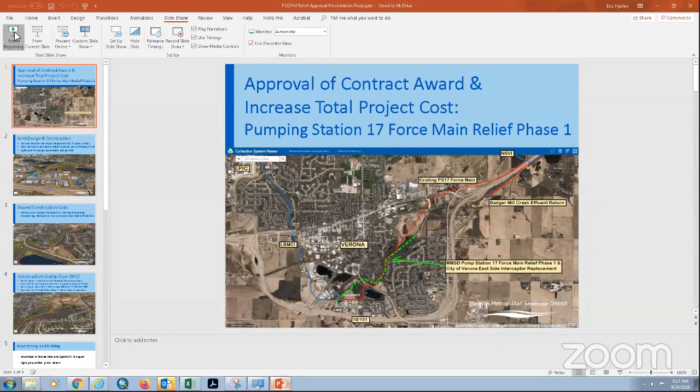I'm presenting on approval of the contract award and increase in total project cost for the Pumping Station 17 force main relief. What you're seeing on the screen in green, the green dashed line, is the Pump Station 17 force main relief project, phase one.

The need for this project is additional capacity needed approximately 2025 due to growth in the City of Verona and in the lower Badger Mill Creek basin on the west side of Madison.

In approximately 2025, we will complete the lower Badger Mill Creek interceptor, phase 5 of that. That's on the left side of the screen. I'm pointing to it with my cursor right now.

There's a City of Madison lift station at Midtown Road. At that time, that lift station will be relieved by the lower Badger Mill Creek interceptor, and all that flow is going to go to Pump Station 17 in Verona.

This is phase one. The schedule is being driven by the City of Verona. I'll discuss their portion of the project on the next slide. For phase two, we will need to connect from the end of this green line, the end of this project, to our existing interceptor system.

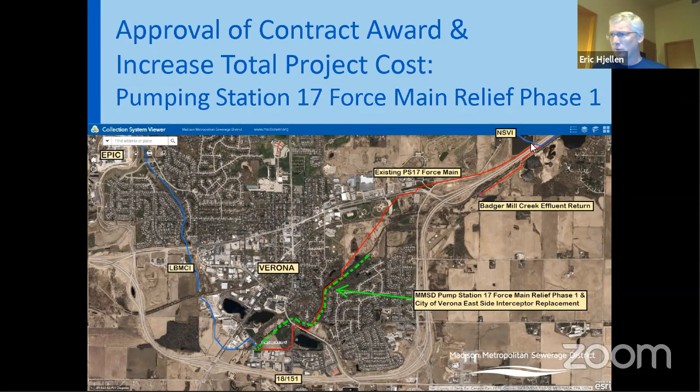The red line is our existing Pump Station 17 force main. We're going to need additional capacity in that system, so our project is going to build a new relief force main. We're going to keep the existing force main and have a second additional force main.

We've been working with Theron Jacobson, the Verona Public Works Director, and his staff. They've taken the lead on negotiating easements and permits. We've been involved too. It's been great working with them, professional staff. Really appreciate the work that they've done and the professionalism in working with them.

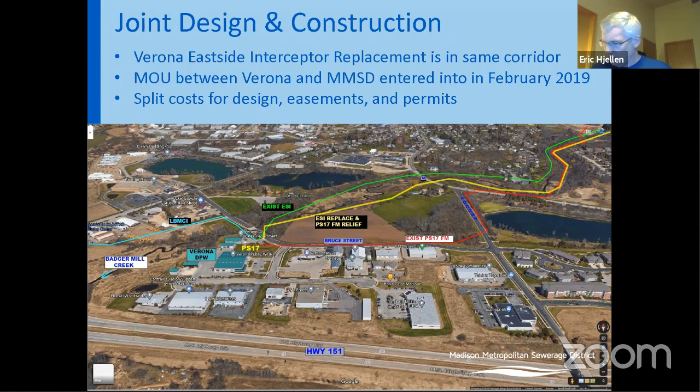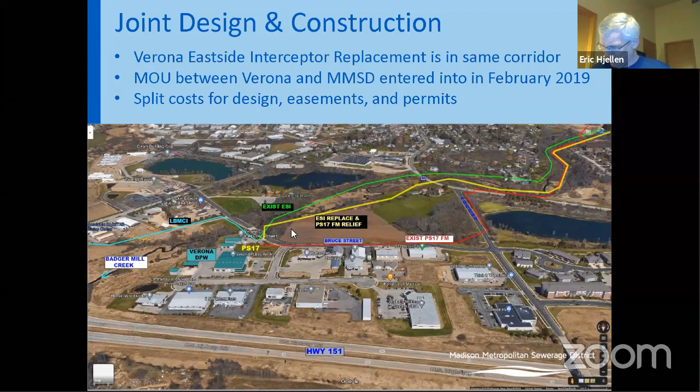As I said, the phase 1 portion is being driven by the city's schedule. They need to replace the existing east side interceptor now. I'm going to move on to the next slide.

This is just moving up the corridor to the north a little bit. Yellow is still our project. The green line is the existing east side interceptor. The red line is the existing MMSD Pump Station 17 force main.

There will be shared construction costs on this. So in addition to the savings on easements and permits, and a little bit on design, we'll save on construction as well. For instance, in this photograph, you can see we're crossing the stream a couple times there, so all the clearing and grubbing, we'll share those costs, mobilization, dewatering.

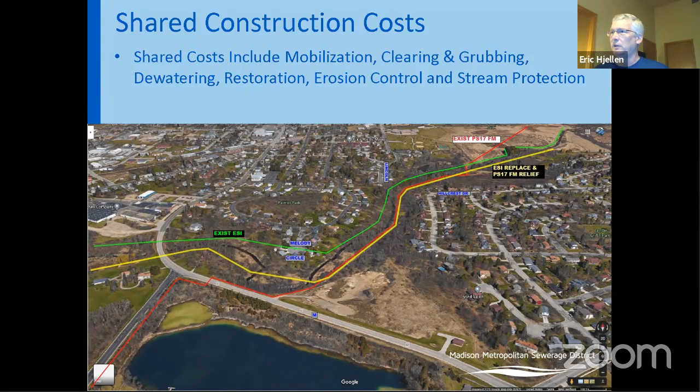Dewatering is going to be a large portion of the costs on this project. Erosion controls, stream bank protection. I'm going to get into a little bit on the cost split now.

Again, we've just moved up a little bit to the north here. The yellow line is the project I'm speaking of, phase 1. On the opinion of probable construction costs, the OPC, there were 96 bid items, and the cost split for construction is based on a review of the opinion of probable construction costs.

I'm going to back up a little bit and describe how we have done projects in the past. I'm going to use this one as an example. There's our project and then Verona's project. I'll call ours project A and Verona project B.

So we would take our project A and figure out all the bid items associated with that - our force main and anything else associated with our force main. And then they would take their project and figure out what are their bid items. Each project would be bid together, but they would be separate projects, so the award is based on project A plus project B.

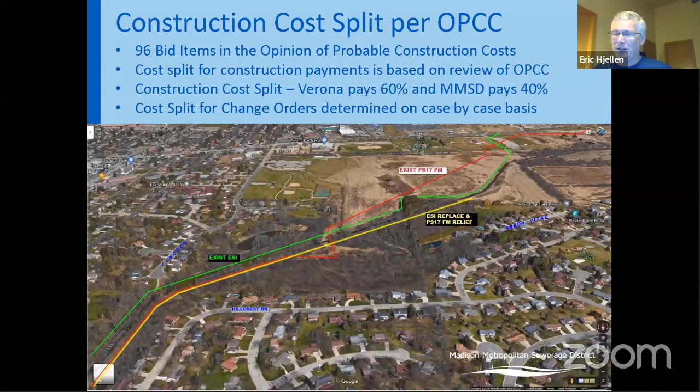What often happens is somebody's unhappy. We say, well, we got a really high price on our pipe and Verona got a better price on their pipe, and we don't really know why. It just happens. Sometimes somebody is unhappy in the end, whether it's us or Verona.

So what we've done this time is myself, Theron Jacobson, Bruce Borelli, we sat down before the bid opening. We took the opinion of probable construction costs and went through item by item and assigned items. So we said, okay, here's our force main pipe, we're going to pay for 100% of that. Verona's going to pay for 100% of their interceptor pipe.

Then we took other shared items and negotiated the split. For dewatering, I believe it was 45-55. We went through all the bid items in the opinion of probable construction costs to figure out the split, who pays how much for each one, and to make sure the cost looked reasonable.

At the end, we totaled all those up and figured out a percentage based on that estimate of construction costs. Based on that review, we came up with Verona paying 60% of construction costs and we will pay 40%. The cost split for change orders will be decided on a case-by-case basis.

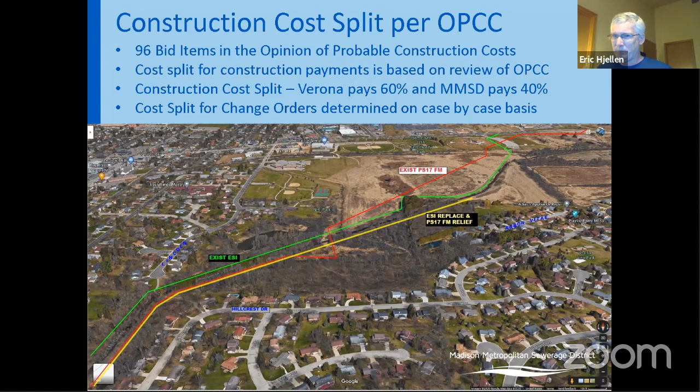You'll see their total on the next slide. They're paying for their project, Dane County is, and Verona and MMSD we're going to pay based on the cost split we've decided.

We advertised in the Verona Press and on Quest CDN in August. It had a lot of interest in this project, which was good - a lot of contractor interest, 8 pre-qualified prime bidders. We accepted bids on Thursday, September 17th. We received 7, and the low bidder was Minger Construction at about 7.8 million.

Our portion of that cost, based on that 40%, is 2.95 million, and Verona's portion is 4.4 million. And that Dane County project I mentioned, that's $380,000.

A little bit about Minger Construction. This is our first time working with them as a prime. They did do a boring for us for the pump station 18 force main - they bored underneath the belt line. They weren't the prime, they were a sub on that one, and they did a good job.

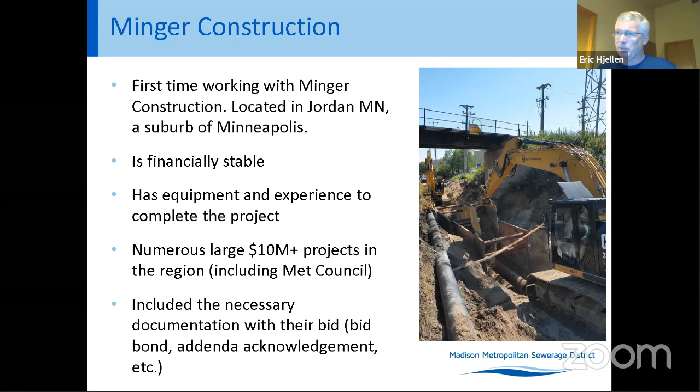They're in Jordan, Minnesota, a suburb of Minneapolis. Financially stable, they have the equipment and experience to complete the job, lots of $10 million plus projects. The photo in this slide is from their website. They had all the necessary documentation, addenda acknowledgement, so we're happy with their bid.

Finally, our recommendations, following the resolution: approve the low overall bid amount of $7,761,804.60 by Minger Construction. Approve the district's portion of that overall bid amount, based on the 40% split, 2.95 million. Also increase the approved total of the MMSD project cost from approximately 3 million to approximately $3.5 million.

That increase is due to differences between the estimated and the actual bid amounts.

This next one is actually information, not a recommendation—sorry about that. The project costs will be paid from cash reserves. This is not a Clean Water Fund project, and we do have adequate cash reserves to cover those costs.

Finally, authorize the city of Verona to execute the contract on behalf of the district. That's one thing I forgot to mention earlier: in the MOU, the city of Verona will be administering the contract. So when the contractor pay requests come in, the city of Verona will pay that, and then they will bill us for our portion.

And that concludes my presentation. Any questions? Does anybody have any questions?

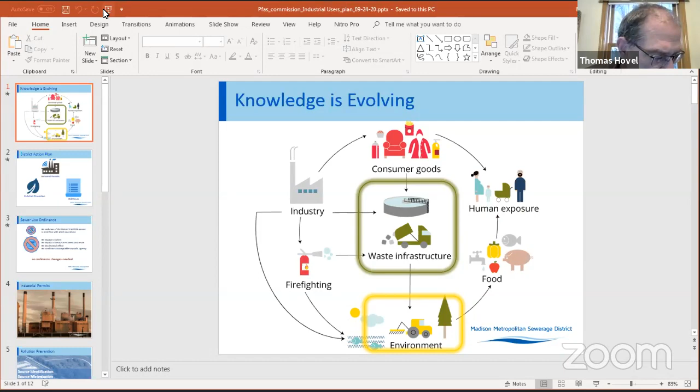So I got to get back, go back to the top here just a second to the next item. So that will take us to item number 6, the study session on district pre-treatment approach for engaging commercial and industrial users around per and polyfluoroalkyl substances.

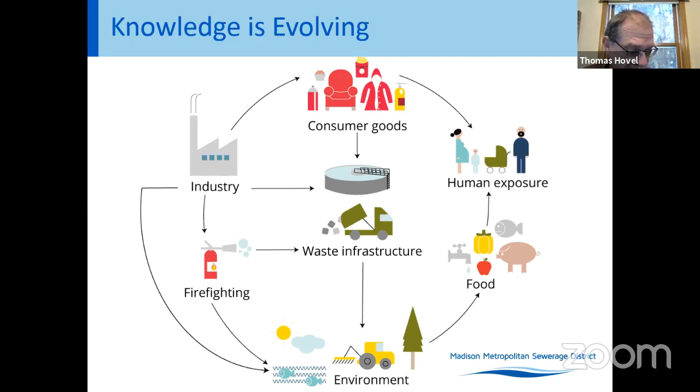Marty, you're going to take this? I am. Thank you, Commissioner Hovel. Nice job on that pronunciation. So I'm going to jump right in here. Some of you should be very familiar with this slide. I like to start out all of my PFAS discussions with this slide to give a little bit of grounding and perspective on where the wastewater treatment plant fits into this large, ever-evolving topic.

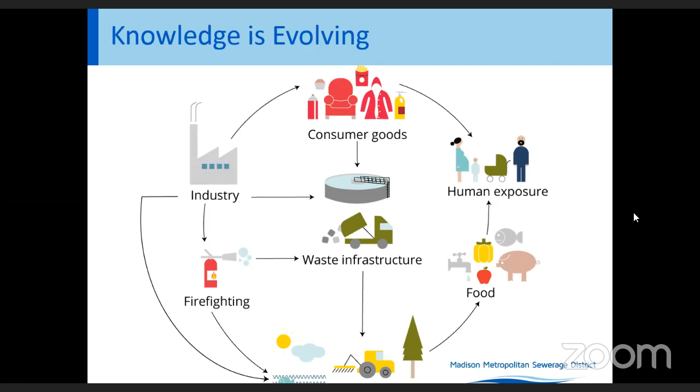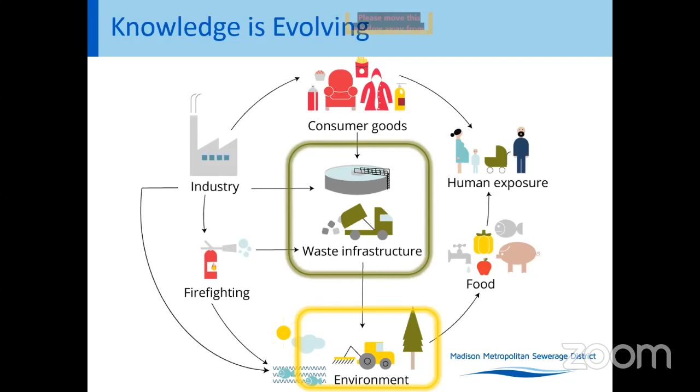So the key here is that our knowledge is evolving, and we really need to understand where we fit in as a district. That will allow us to understand the pathways that we can control and act upon. Looking at this graphic, it's very circular, with an inner part of the circle, circled in green, which is where our wastewater treatment plant sits. But there's also this outer part of the circle with a lot of other things that could be of interest. Our wastewater treatment plant is not just a receiver in the middle of the circle, but we also touch the outside of the circle, because of our heavy commitment to resource recovery and reuse.

So if you recall, we do have a district action plan around PFAS, and there were 3 broad items identified in that plan, related to engaging our industrial and commercial users around PFAS. Some of those 3 major things we said we would do in our action plan were our sewer use ordinance review, review of our industrial permits, and also looking at how we would begin pollution prevention efforts. We chose these 3 broad areas as part of our action plan to make sure that our industrial permittees are aware of potential aspects of their operations that may contribute to PFAS.

And we also felt that if we engage our commercial and industrial users early, it would allow us to expand our options and things we may want to put in place to assure that our PFAS loading, or PFAS that is coming to the plant, is minimized.

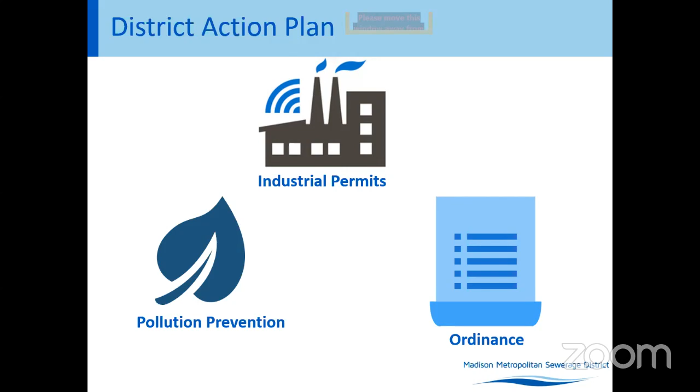Establishing those relationships will allow us to have a better way to collect data and work with our district permittees in the form of our industrial users. So I'm going to go through each of these specific areas in a little bit more detail so you have a good understanding of the whole suite of approaches we're going to take with our industrial users.

The first one I want to talk about is our sewer use ordinance. We completed a review of our current sewer use ordinance, and the goal of that review was to determine the authority that we may have or not have when it comes to regulating PFAS compounds in the collection system. As you're all aware, there are no state standards for PFAS, so we would be looking at how our sewer use ordinance stacks up in the absence of state standards.

The first point I want to bring up about our sewer use ordinance is that it specifically says that we cannot allow discharges that would result in a violation of our WPDES permit or interfere with plant operations. This particular prohibition is in state administrative rule and incorporated into our sewer use ordinance through reference. That prohibition is generally for all pretreatment programs in the state. It's not specific to the district, but it's in our sewer use ordinance, and I wanted to call attention to it.

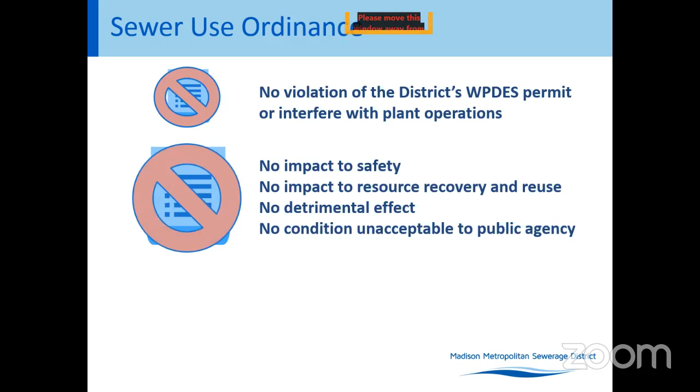Our specific sewer use ordinance actually takes this prohibition a step further and expands that to a lot more prohibitions. It basically says that you can't put anything in the sewer system that would impact safety, impact our resource recovery efforts, or cause any detrimental effect, which is actually defined in our sewer use ordinance, and can't result in a condition that a public regulatory agency would find unacceptable.

So in combination of the state administrative rules that govern pretreatment programs, which we incorporated into our sewer use ordinance, and in addition to our specific provisions, we really have sufficient authority to look at PFAS compounds when it comes to our industrial users. We definitely can assert authority if we wanted to, and our idea of utilizing a source reduction program to reduce sources of PFAS is definitely within the authority of the sewer ordinance. So our review basically summarized that our current sewer use ordinance gives us the authority to do what we need to do to help minimize PFAS.

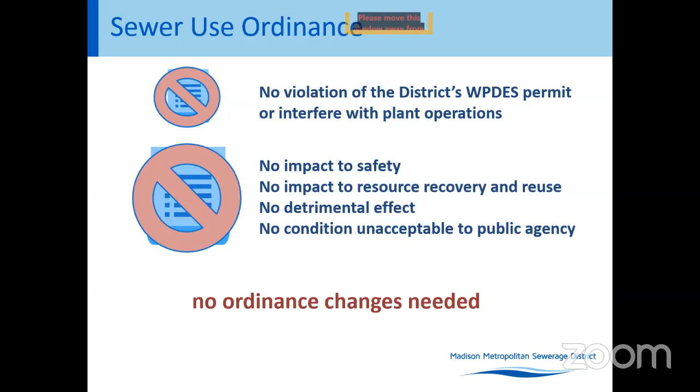So we would not need to make any changes to our sewer use ordinance. The next item in our action plan was reviewing our industrial permits, specific to our categorical industrial users. To date, the district has already completed an initial review of our categorical industrial users.

By initial review, I mean that we looked at which specific sectors or industries we already know manufacture or create PFAS compounds. We were able to look at specific business sectors and understand historically and traditionally the types of compounds they dealt with. So we took a list and said, okay, do we have any of these original manufacturers of PFAS compounds in our district, either historically or currently? Our review found that we do not have any current manufacturers or creators of PFAS compounds.

We still need to beef up our historical search. As you know, our service area has been around for a very long time and involves many municipalities that have historically had lots of industry, so that's something we need to continue. But really, the whole goal of this is to understand what, if any, PFAS compounds are being used or have been used.

The other piece of this, in addition to that review, is to also look at our permit renewal process. For our categorical industrial users, we are a permitting entity, so we have the ability to put permit conditions in place. As we go through our permit renewal process and start cross-referencing sectors and potential and probable sources, that's one option we're reserving to work with our industrial users to see if there are provisions in our permit we may also be able to utilize, like entering best management practices or other things to help ensure reductions of PFAS coming into the collection system.

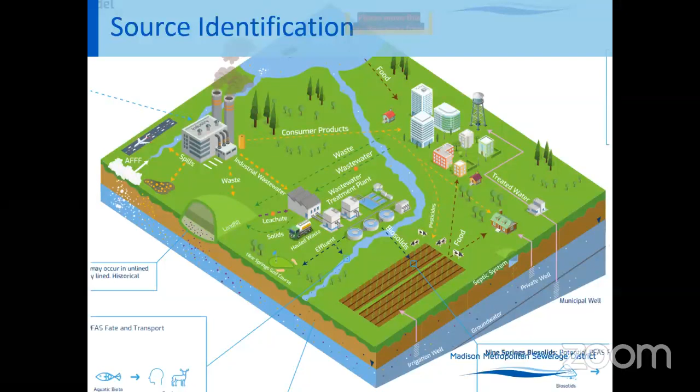When you really look into our piece of the puzzle, we were going to look at potential sources. But once we look at our potential sources, we have to take another step. We have to look at, okay, if there's a potential there, what is really the probability that it's actually being used there? And that's where we get into looking at our probable sources.

The easiest way for us to really look at that is to ask our users themselves. What are you using? What do you think you could be using? What are you using that could contain these compounds? What do you know, what do you not know? It's a very initial information gathering exercise. We plan on using a survey or interview or some type of process to get that information.

The other piece of this is to examine what's already happening in the industrial facility. That would involve maybe reviewing the safety data sheets, looking at the industrial processes and what chemicals may be used, so what is planning to be used, or what comes in at certain parts of the processes. This becomes a challenging step, because as we all know, safety data sheets don't necessarily always provide 100% of the information. We also know that depending on the ratio and makeup of the chemicals, and how much of a certain compound is part of the formulation, that may not necessarily give us the best information off the safety data sheets.

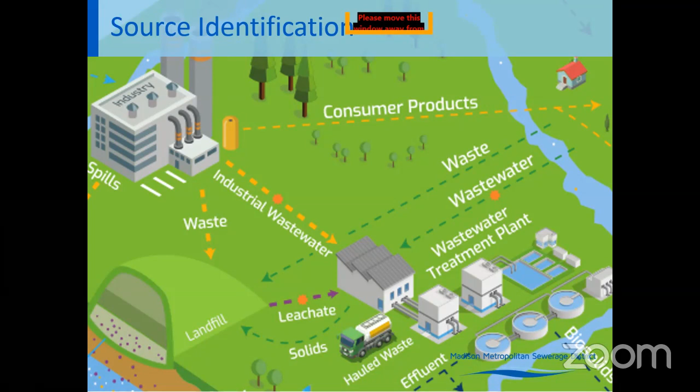Once we get this short list of probable sources, we can then take the next step of developing monitoring to verify and understand what those probable sources are actually giving us. That's where the linkage to our sampling and analysis plan, which you're all familiar with, comes in - we talked about different phases and tiers earlier. The third tier talked about going into the collection system and looking at how we identify probable sources. That's where that connection comes into play.

The next part is source minimization. Once we know what's out there, identify what's out there and what's probable, we can take the next step and say, okay, how do we now begin to minimize those sources coming to the plant? Monitoring is going to be a big piece of that. We need to work with our industrial users to reduce or eliminate their PFAS compounds, and monitoring is one way to verify that's happening. But really, the crux of source minimization is working with our industrial users to figure out what they can do. There's a lot of options for how to minimize the sources of PFAS, and that can range from product substitution.

If you identified a product now that you may not have known before that contains PFAS compounds, maybe there's another product that does the exact same thing as part of your industrial processes that you could switch it out for. Another option could be you could modify your operational controls. For instance, you could have a particular system set up where you are discharging to sewer, but maybe now you can set something up differently where you put it in a holding tank, or your waste doesn't have to be discharged and you could treat it more properly as a hazardous waste or some option like that. So sort of changing your operations or how you're controlling your waste stream. And of course, there's always treatment, which for smaller waste streams is effective for PFAS.

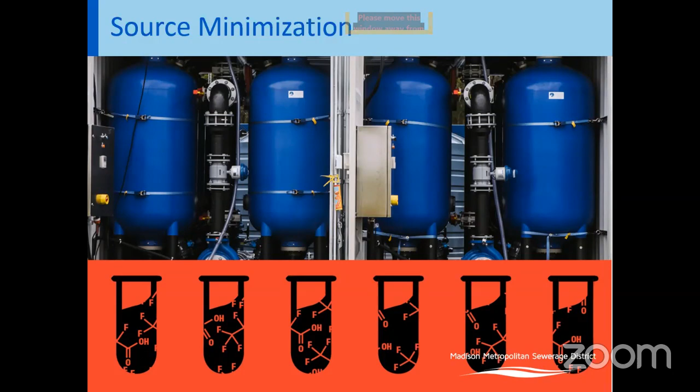So with those three parts - identifying the source, minimizing the source - we ought to make sure that we actually maintain our minimization of the sources. And so that's when a fully developed pollution prevention program can bring us into the future by ensuring that all of our upfront efforts continue to be maintained.

And while we haven't really fully developed our pollution prevention program for this yet, it really would have a strong monitoring component and understanding options for pretreatment systems and product phase-outs. And then we also can bring it back to our sewer ordinance to understand what our authority is there. And then all that together should help us maintain our good reductions that we hopefully will see through our pollution minimization efforts. So we'll be monitoring the collection system as well as the plant processes, but also monitoring potentially our industrial users to make sure that we're really able to quantify the reductions that we're seeing.

So the immediate next steps is for Amanda and I, our communications manager, to work together to begin a process of starting to engage our industrial and commercial users. The plan is not to just send out a letter with a survey and say, hey, tell us what you got. We want to make sure that our industrial and commercial users really understand the context and why we're undertaking this exercise.

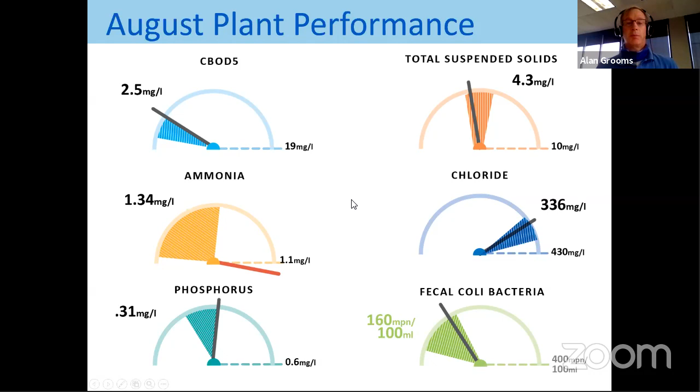Chloride, fecals, we're on the home stretch with that old UV system, so that's continuing, I think we're going to make it, knock on wood. But as you can see, this is the first time we've had to create a dashboard dial that shows a red line over the limit. So what we had, as Michael mentioned, we had a monthly average on ammonia of 1.34 milligrams per liter on our discharge effluent, and our numbers on that typically are under 0.5. 1.1 is our summertime limit through the end of September. What we experienced was, I'll get into more detail on that, I've got a more detailed slide on that particular metric to explain what happened there.

Resource recovery numbers, through August, as a rough rule of thumb, if you divide by 2 and multiply by 3, that's about 2/3 of what our yearly total would be. So we're right on track where we expect to be on struvite, looking at about 680, 690 tons that we'll ship out this year.

Clean water, we're a little lower than we have been. We're looking to be on track for about 16, a little under 16 billion gallons for the year. Unless we get a wet stretch, that's probably where we'll come in. We've had a fairly dry year. Biogas is going to come in right around 290,000. All of these look to be projected about where we would expect to be.

The exception is the Metro Mix product. We made a lot of product early in the year to deal with the lack of storage caused by the early weather shutdown on fall hauling last year. As we rolled into spring, with that lack of storage, we needed to get it out because we didn't know when the fields would open up. So there was a mix of Class A and Class B product created early in the year. We haven't made any more of that Metro Mix, that cake product. We just in the past few weeks got the last of it hauled to landfill.